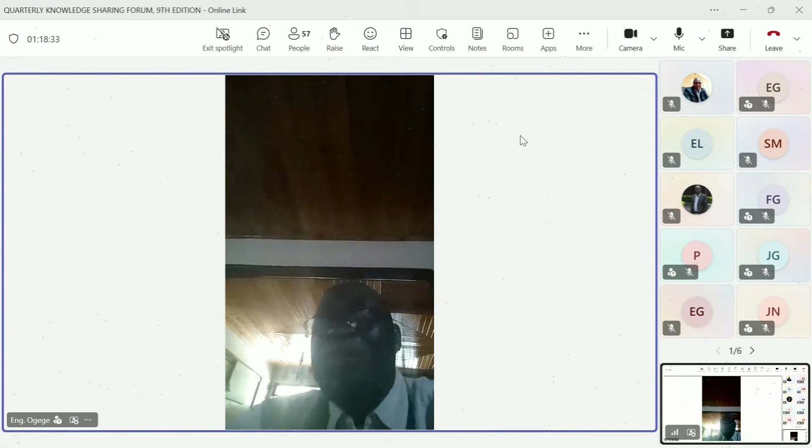The purpose was to produce a pool of trainers that would in turn continue training other younger engineers and inspectors so that this knowledge can be extended beyond the project into all other pieces of infrastructure experiencing the same kind of challenges. This manual therefore represents an important milestone in ensuring the long-term safety, resilience, and sustainability of this strategic piece of infrastructure.

The Dongo Kundu bypass, as you all know, is a critical corridor that enhances connectivity and facilitates trade and supports economic growth. The corridor interacts with the airport, it interacts with the standard gauge railway, it interacts with the old railway line, it interacts with our seaport at Kilindini, and also the new port envisaged at Dongo Kundu and the special economic zone.

So to protect this valuable investment, effective maintenance is essential. The training that culminated into this manual provided practical guidance that will strengthen inspection, monitoring, and maintenance practices, helping to extend the service of slopes and bridges while ensuring safety, not only of road users but also of our crew, the inspectors, the inspection team.

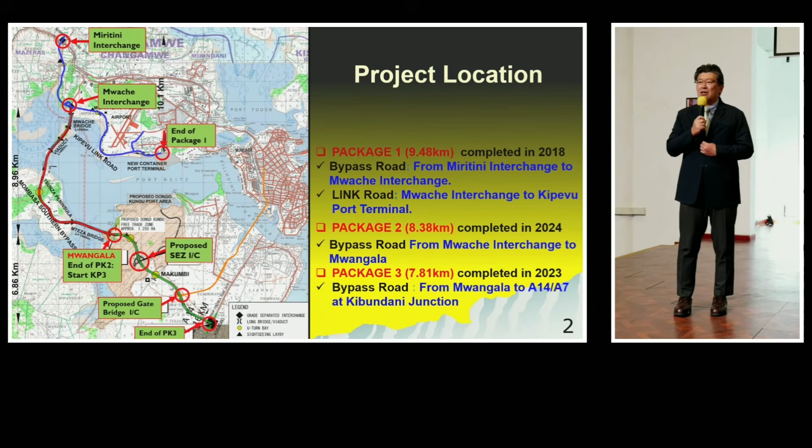Not only the regular maintenance, but also focusing on the two special structures of significance, the bridge and slope, to build capacity and talk a lot with the KeNHA engineers, engage with all the practice of the maintenance works, and then finally put it into the manuals.

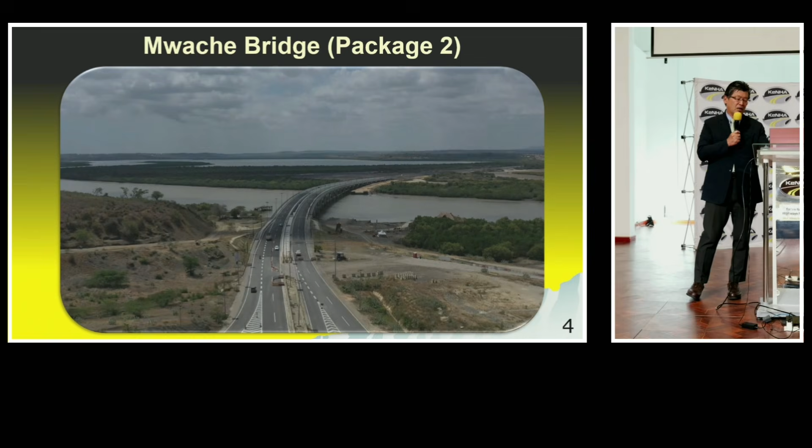So one is slope. There are many slopes because the earthwork deals with cut and fill works. Due to the geological condition, which is very vulnerable, special consideration should be needed for maintenance. And then there are 3 long span bridges on the road: the Mwache Bridge, Tsunza Viaduct, and Mteza Bridge, which is the longest bridge in Kenya as of now. Also, there are a lot of structures like U-turn bays on the way.

As I say, our consultant work includes maintenance advisory works, which is the first case. At first we didn't know how to do it - what should we be advising to KeNHA for these new structures? But we decided to focus on the bridge, long span bridges, which are very unique compared with ordinary bridges, and also the slope, which compared with other slopes has very vulnerable conditions requiring special protections. Also, the condition of the adjacent structure, the airport, is a bit complicated, so we try to do something special - techniques or procedures to deal with this slope.

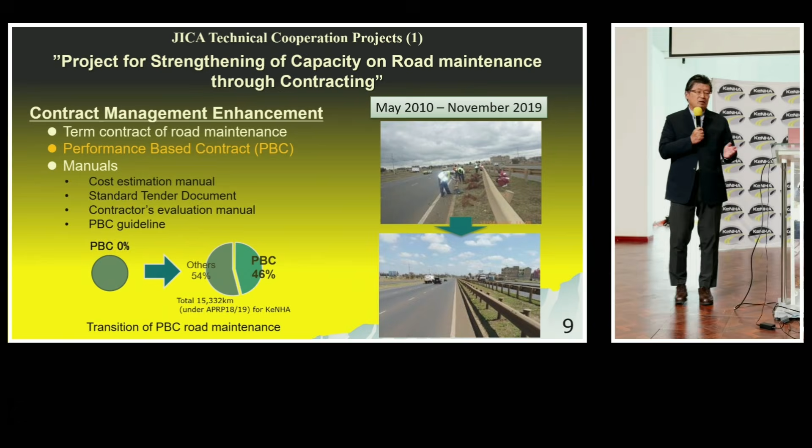But we also collaborate with other JICA funded projects, which is the PBC project, which is already done and is now the norm for routine maintenance in Kenya. And also there's an ongoing bridge maintenance project done by Fujiwara-san and others, which is now almost finished.

So when we started the advisory works, those two things did not yet exist. But gradually over the period, these two new procedures of maintenance were put in place, and are now exercised a lot. So we collaborate with them, so the bridge is already integrated into all the bridge maintenance systems across Kenya. But we should focus on the special consideration on long span bridges by the sea.

The PBC is already put in place in the Mombasa Southern Bypass. So how to integrate the PBC contract to deal with the slope - we're just focusing on slope, but basically routine maintenance will be conducted within the PBC scheme.

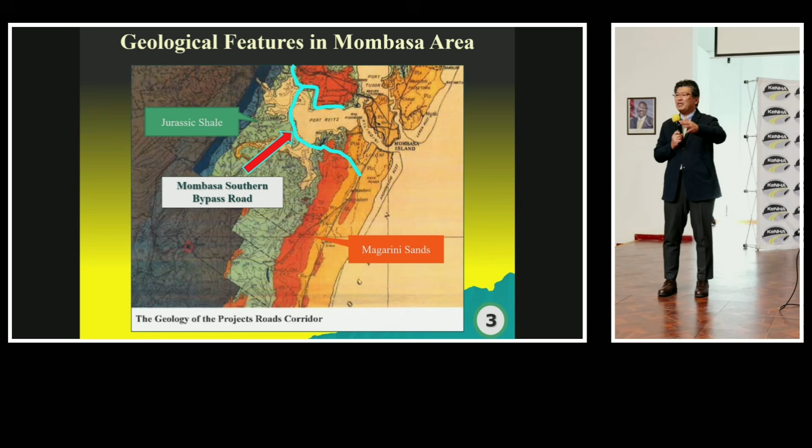I can explain about the condition of the slope, particularly in the end part, which is in the Mombasa region, compared with other regions in Kenya, which is relatively young because of sediments from the accumulation of sand brought from the sea. So the two major features in this region, one is Jurassic shale rock.

So once exposed, it's easily weathered and has no strength at all. That's the condition. Sometimes you can find this in the area around the Mwache junction and beyond, to the conjunction with the northern corridor. Another thing is...

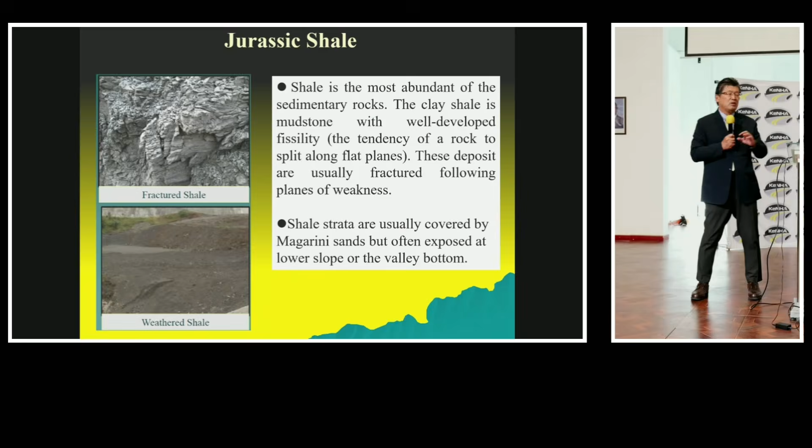...just accumulated on the shale, called the Magarini sands - I never heard of the name before. But Magarini sand is very soft, unstable sand sediment which is on top of the shale. You can see here, the Magarini sands. It's very unstable and easy to be eroded, creating gullies. The surface water runs and digs the land, making gullies, and it's easy to erode. That's the area, which unfortunately is around the airport areas.

So that's the condition given by the design teams. That's the regular cross sections of the road to deal with.

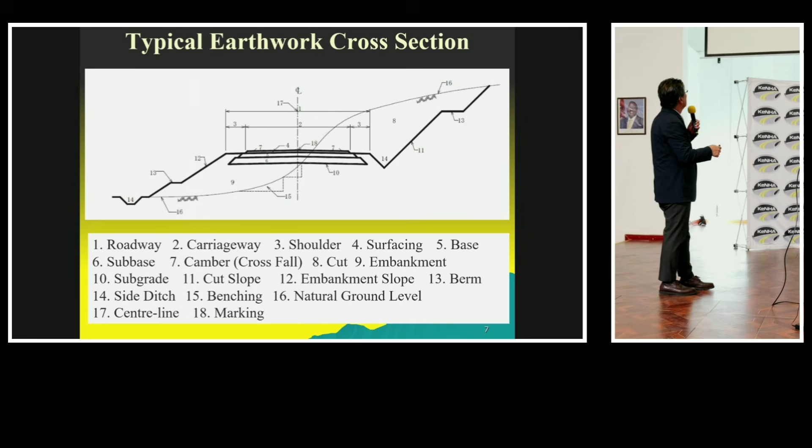Usually this is the original cross section. So in order to build these roads here, we have to cut part of the slope and fill it on those, and then make a flat space, and then make a road with shoulders and drainage systems on both sides, and then there's a slope here.

So in a design stage, we have several things to consider in order to decide where to put the roads. Because the budget is limited, we have to minimize the cost as much as possible. So the point to be considered in design is to balance the cuts and fills, so that the volumes of the cut section can be put into the fill sections. We try to balance it so that there's no additional soil or export of soil from the ground.

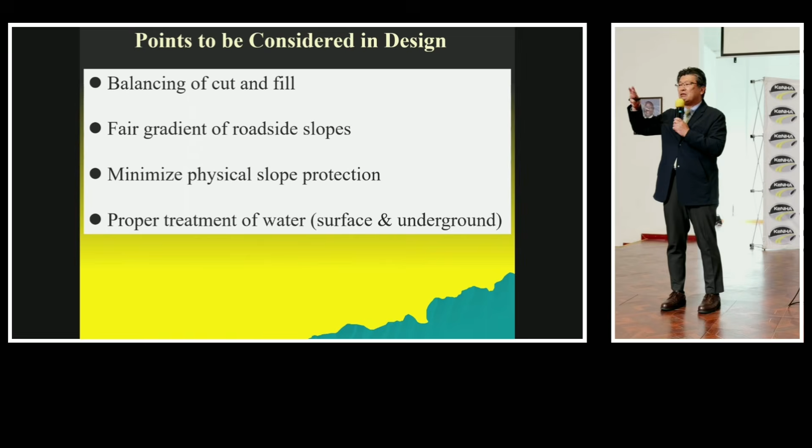And then the slope should be at fair gradients, depending on the condition of the slope sections. Where it's sand, it should be very stable, like 45 degrees. If there's rock, and it's very stable with no weathering, then the slope can be steep and self-standing.

But sometimes, due to the limit of our road reserves, which is happening in Kipevu Road, because of the airport on one side, and then the SGR, and the mangroves and coastline on the other side, we have to think about the alignment within the limited space. So we try to minimize the slope protections, but somehow we have to protect unstable conditions to keep them stable.

Then the problem is always the water. The water is coming, and Mombasa is a monsoon area, so there's lots of rain. Sometimes it's on the surface, and sometimes it's underground. The water is always a problem and nuisance for slope protections.

In the southern bypass, the problem is happening in two areas. One is Mwache Junction, which connects to package 2 of the corridor, and then the area around the airport.

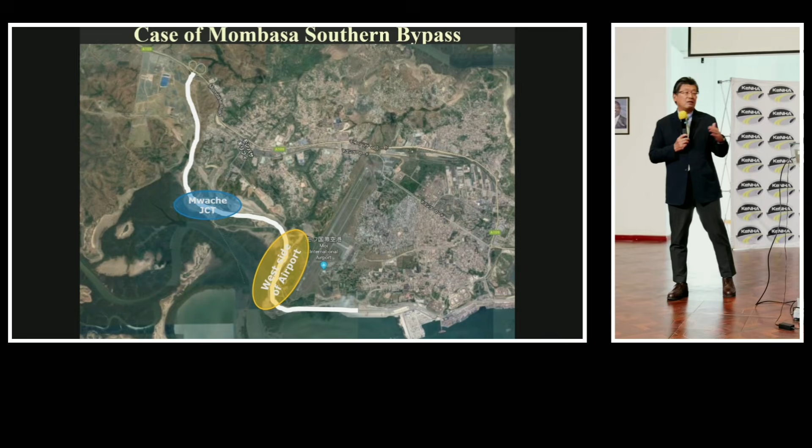Especially the airport area, which looks like this. There's a Kipevu Road here. There are slopes, and on top of the hills, there's Moi International Airport here.

So the road is here because the SGR is coming here, so the alignment of the road should be here, but only between our boundary, the road reserve boundary, and the shoulder. We have to cut the slopes, but sometimes we have steeper hills. Then, in order to keep the stability of the slope, we have to put in slope protections.

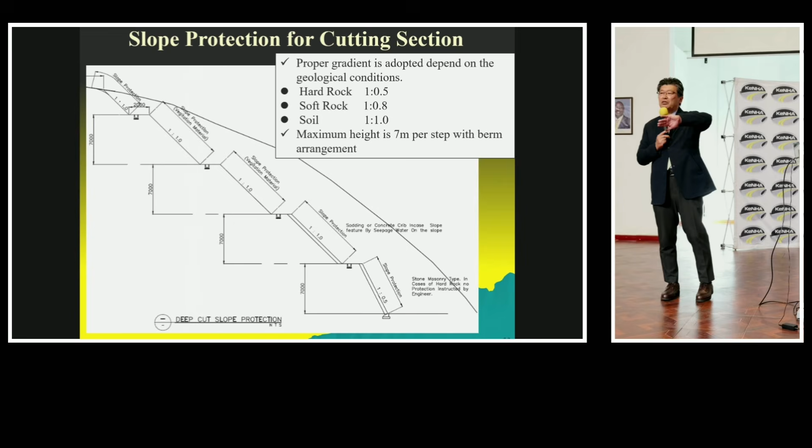So this is an ordinary cross section of the slope. Usually 7 meters high, and we try to make the gradient bigger, but in this case it's 1 to 0.5, which is very steep on the first slope, and then 1 to 1 on the second, third, and fourth, up to the boundary between KAA and the road.

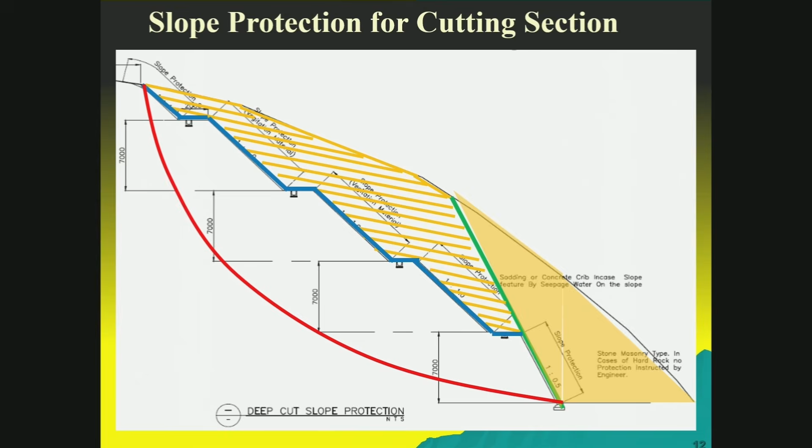We try to minimize slope protection structures because they're very expensive and very difficult to maintain, but it's inevitable. So in design, we have to choose the proper way of protecting the slope.

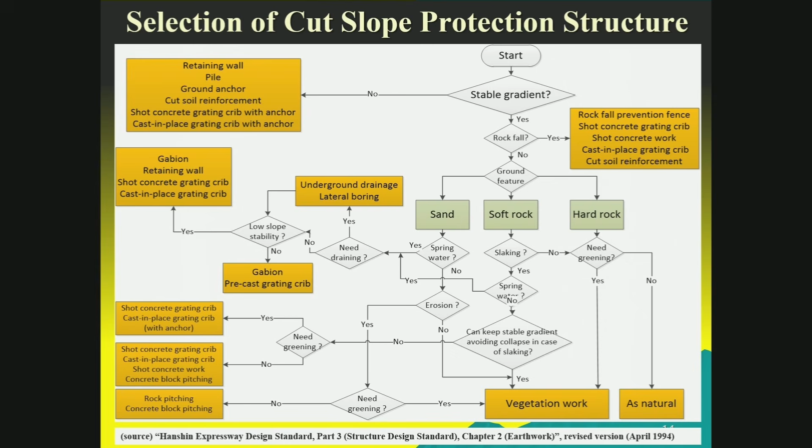So we have 4 protections for cut slope and 1 protection for the embankment. One is stone masonry, which is a block layer of protection, the strongest protection, so we use it for steep structures, usually on the first layer, first slope, just beside the road, because it's the most important part to protect the road.

Then gradually we try to reduce the gradients, and we use 2 types of structures, called rip rap, which is covered with stones and connected to each other with cement.

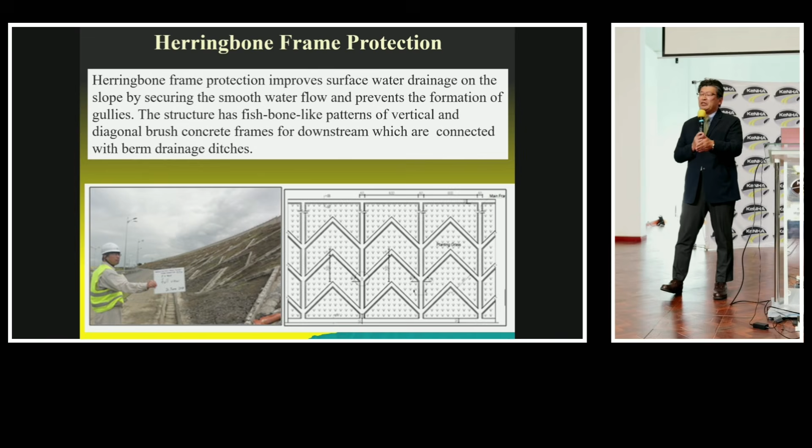Another reasonable way is to use herringbone frame protections. These are frames, not concrete, stone covered, but look like a herringbone, which is a frame construction. The frame itself clings together to protect and support the slope. This frame is also used for drainage, and the area between the frames is where we put grass to protect it.

If the slope has lower steepness and less gradient, we just put grasses. The grass should be deep rooted so it can grow naturally and protect the land and the slope from sliding. The choice of grass is very important.

It should again be deep rooted and indigenous. We don't want to bring exotic grasses into Kenya, so it should be domestically grown.

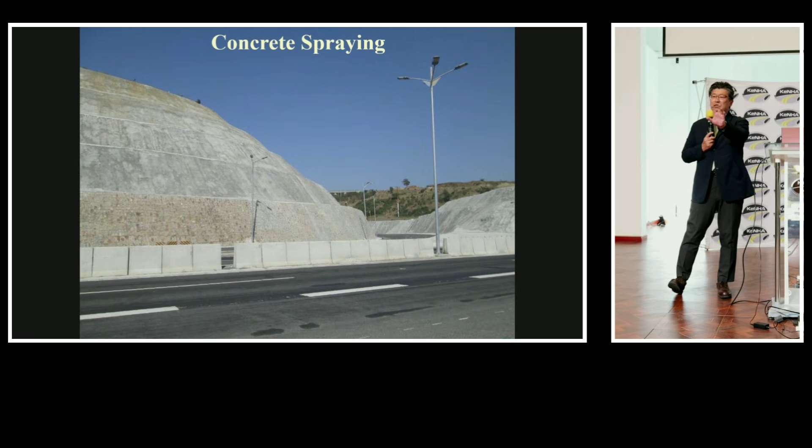When you deal with shale, Jurassic shale, which is strong enough, but once it's exposed it weathers easily and becomes less strong, so we spray concrete. These pictures are shown at the Mwache junction. This is very steep, about 20 to 30 meters high, and we spray concrete to protect it and not expose the shale rock from outside.

Another important structure for slope protection is not protecting the slope itself, but dealing with the water. Water is a very important factor that makes the slope weaker, and the Mombasa region has lots of water and rainfall, so the slope drainage facilities or systems should be carefully done and maintained.

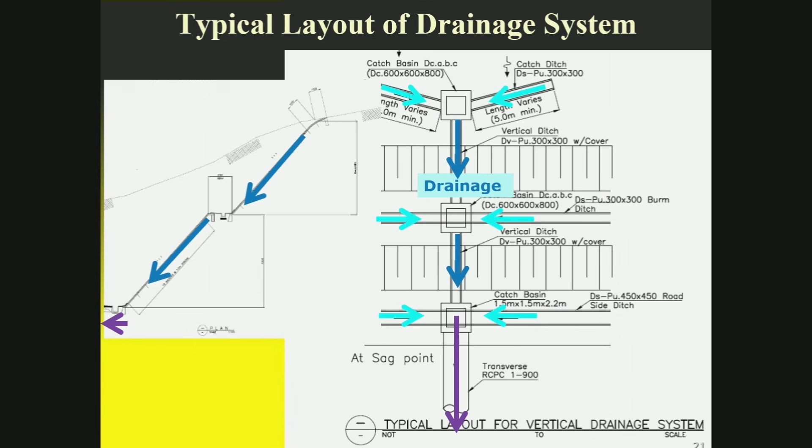A slope needs a systematic drainage system, not only lateral drainage, but each slope gathers water and puts it into one place, then vertical drainage carries it into the catchment, then through culverts into the ocean. That's the system, but once it's broken in one section, the water overflows onto the floor and sometimes damages the structure.

This is one lateral drainage system, very important, just beside the boundary of the airport and road, called the cut-off drainage. It actually cuts off the water coming from the airport so it doesn't go into the slope, bringing it instead to the vertical drainage, properly carrying it down without overflowing.

But even if we properly design and construct it, the slope is still a very unstable thing, so there are lots of failures, which are sometimes inevitable. This happens a lot in Japan, because Japan is a land of mountains, so there are lots of slopes. We have a long history of big failures and catastrophic damage on the road.

Several phenomena occur, the most notorious being landslides. You can see landslide lines where water comes down and so much water goes underground, or massive erosion happens. Once there's one trigger, it makes the whole mass of land slide down toward the end.

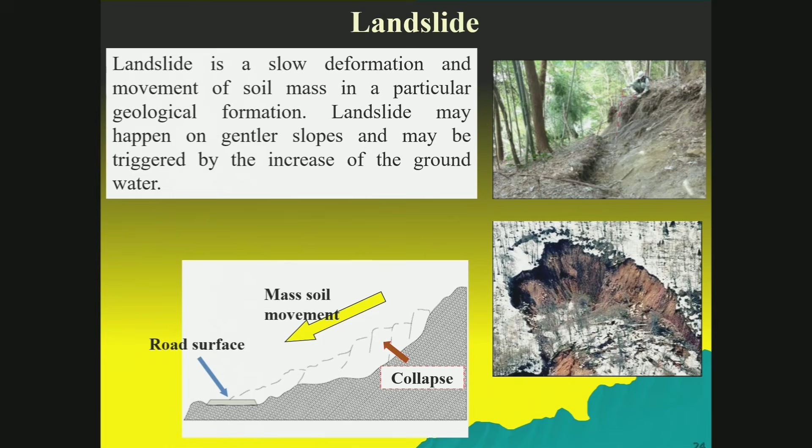I will show you one very dramatic video of a landslide happening in Japan.

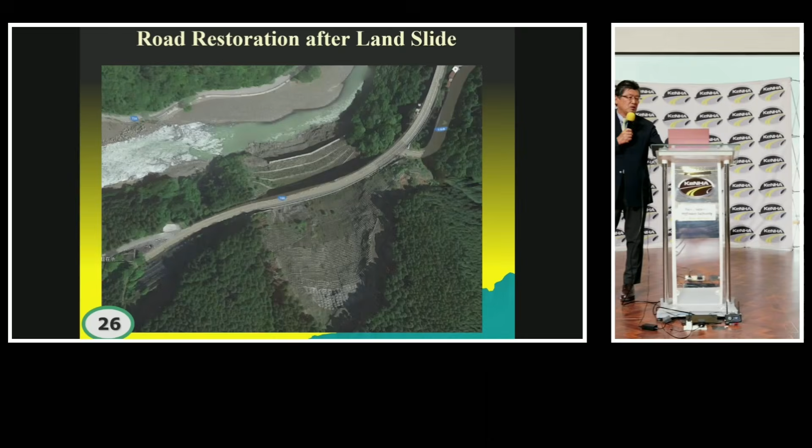This is the picture of the aftermath. See how massive the landslide is.

It's important to show the video itself and how dangerous the slope is, but also for the road authority, think about why this picture could be taken. It's because we stopped the traffic beforehand. We knew the landslide was about to happen, so we closed the traffic, monitored it, and put the camera on. Then that dramatic picture or video could be taken. That's the importance, so of course there were no casualties, nothing.

But the damage is very serious. It takes years to restore it. In this case, instead of putting back the soil, we built a bridge over the landslide.

Another thing which may also happen in Kenya is mass rock failures, which happen a lot and are of course catastrophic. Even with rock, it weathers over years, then cracks form, and once there's a single rainfall or an earthquake, a huge mass of rock falls from a very high point down to the ground and damages the road.

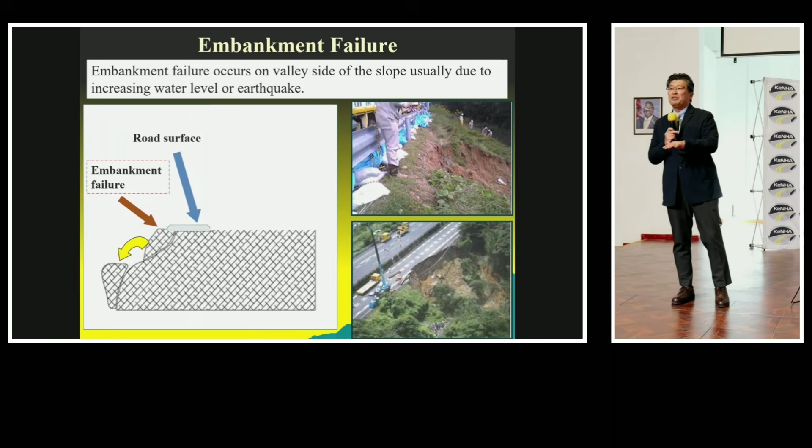Embankments are fillings of soil that you need to protect; compaction alone is not enough, and embankments can also cause landslides. The trigger factors for these kinds of failures are many. In Japan we have earthquakes, but mainly rainfall is the trigger.

Of course, there is a human aspect, like lack of construction, that will be the cause, but mainly it's a natural cause. The rainfalls in Kenya are the biggest factor triggering this kind of landslide.

Once we properly finish the construction, the maintenance stage begins. Unlike an ordinary road, the most important thing for the slope is stability—to keep nothing happening, the slope itself standing, and over the years, even if rain comes, the slope still protects the soil from reaching the road, and nothing happens on the road.

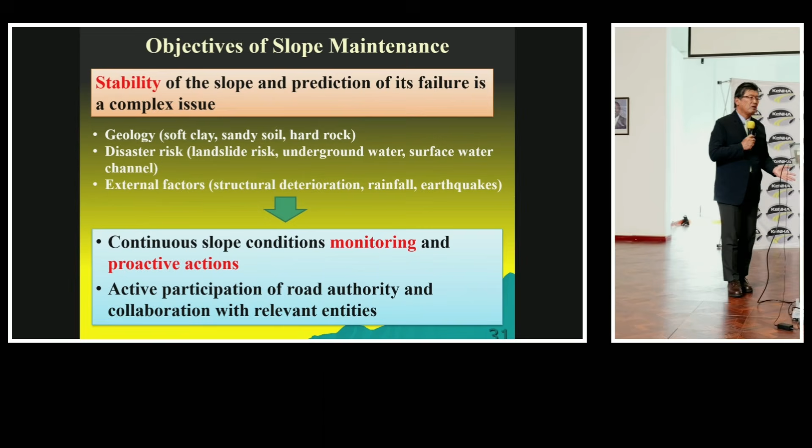But it's easier said than done. The stability over the years gets less stable due to so many causes: soil conditions, risk-causing factors, and external factors.

The change in the slope is sometimes very difficult to see, because the slope is sharp and steep, so it's difficult to access, and sometimes it's covered with bush so it can't be seen. Also, many things happen underground—it's invisible.

What we have to do is keep monitoring, to check and take preventive measures, not countermeasures. That's important—unlike earthwork or pavement, where if you have potholes you take action. But with slopes, as long as we think it's fine, nothing gets done.

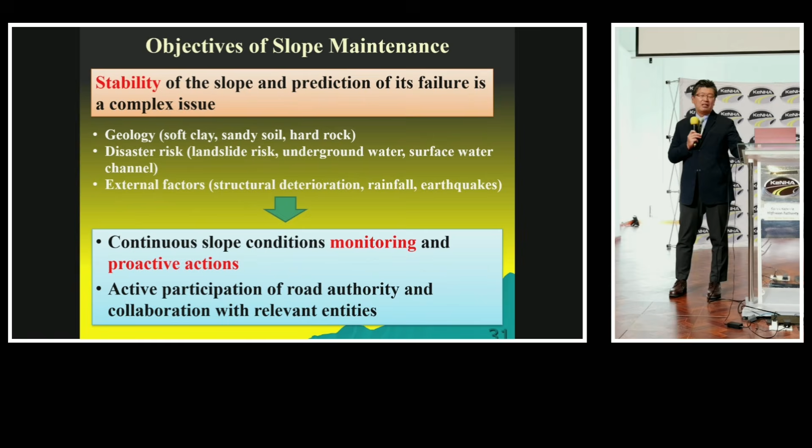Monitoring is still very difficult—not just visual checks, because access is hard and things are hidden, and some of it happens beyond the road reserves. Since the airport is a very secure area, we cannot easily go to the site. So what we're trying to do in Mombasa, especially on Kipevu Road, is introduce drones.

Drones are now common technology in Kenya, so we fly drones using very high resolution cameras to capture images of the area—not just the road reserves, but beyond them, so the whole entire region can be captured.

The image is very high resolution, so we can find all kinds of failures not visible from the road, and sometimes even difficult to approach. We found lots of failures, especially sinkholes caused by eroded sand.

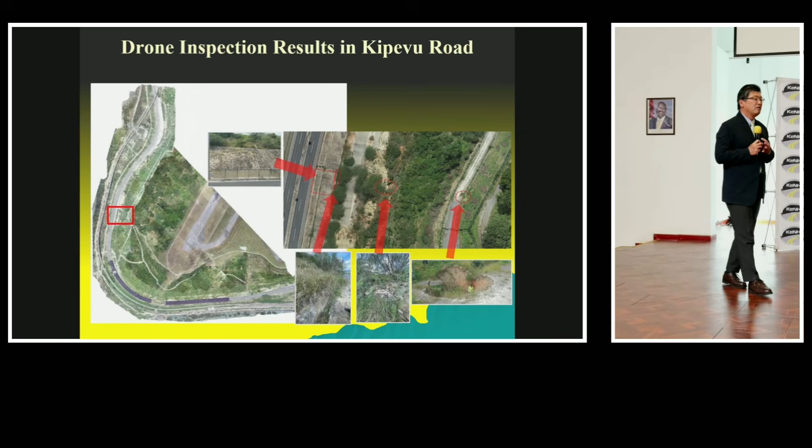There are lots of sinkholes within the airport—these are failures within the KAA premises. We found many such spots in the area, and of course we shared this information with the airport authority.

With this high resolution imagery, we can also get point cloud data, which can be converted not only into flat images but also 3D images. You can see the gradients here—this is the road, this is the airport area—and we can see how steep the area is.

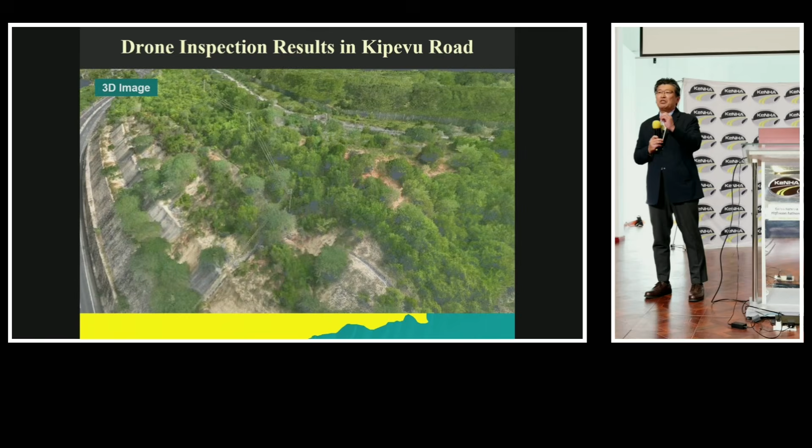We can see lots of sand erosion happening across these areas. With the 3D recreation, it becomes easier to understand the soil conditions together with the slope gradients. But that's just the still image—with the point cloud data and special applications, we can see much more detail.

Then you can switch it. So this is a special application that the 3D image can be recreated like this. So you can move to any place, then you can zoom in and zoom out.

For example, you can see this is the damage area with the erosions, and the damage on the drainage systems, because you can see the sand already goes beyond the slope. And also you can go to the airport area, so this is the patrol roads within the airport. You can see this huge sinkhole happening on the road.

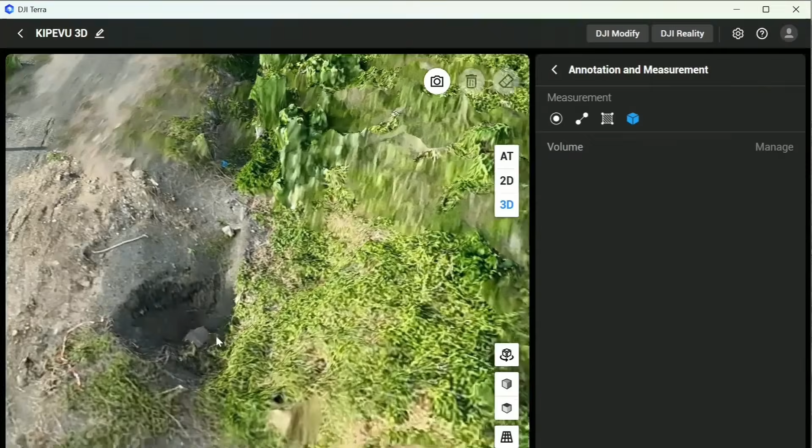Can you zoom in a little bit more? So you can move the image to go to any place. Then you can go to other sections, where you can find numerous sinkholes happening, also within the airport area.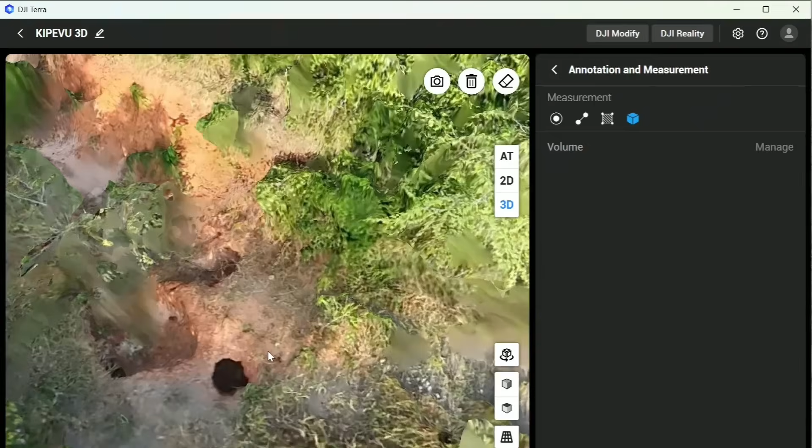Yeah, here. Can you zoom in as much as you can? See, you can see the potholes. So the whole section, the whole area is now sinking. This is within the airport area, which is inaccessible, and also within the bush so it's not visible from anywhere, but the drone can capture it and you can find it.

So this is more like screening the whole region to find out the damage. Then once you find the damage, maybe you should go and check what it is, because sometimes there are mistakes - the hole is not a hole, it should be the shade of the trees. But it's worth seeing these conditions and then finding and trying to think about the solution.

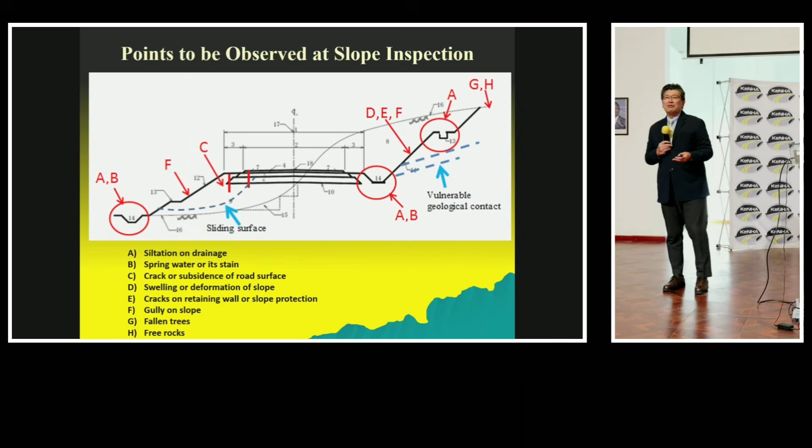So using the drone, there are several places which should be checked for these slope sections. The most important thing is not only the road, not only the drainage systems along the road which are inaccessible, but here, the slope - drone is the one way to do it. Then if you can access it, you can go reach closer, you can go there as much as you can, then put it into the database.

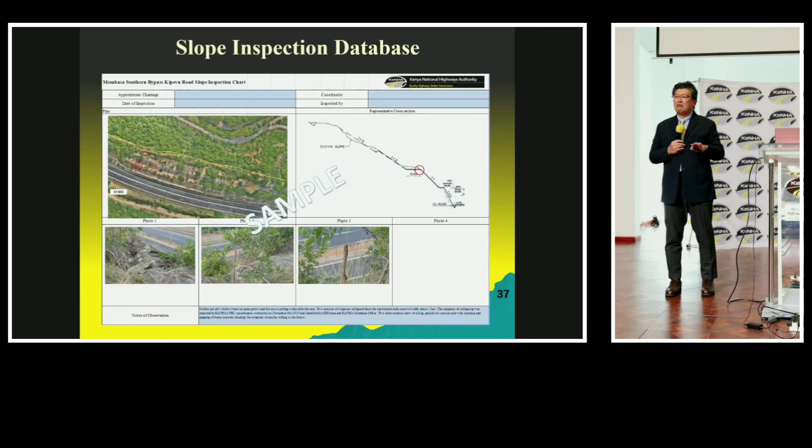I think the pictures themselves - the drone photos that you get closer to give more detail - show the damage, and also the location is the most important data, so that they put into the database. It's not necessarily more like a checklist, just the data - the photo can tell everything.

Then you keep on inspection - the drone inspection that we conduct with the consultant teams is after rainy seasons, so twice a year, two times actually: around June after the rainy season in May and April, and also January or February after the rainy season in November and December. Because rainfall is the trigger, one of the biggest triggers causing the damage.

Then routine maintenance should be done because you conduct the PBC. PBC is done but it's usually mainly focused on the road and drainage system on the shoulder. But what is important for this slope maintenance is routine maintenance for the slope above, which is sometimes missed but important to check.

We advise the coast regions to conduct this routine maintenance integrated into the regular routine PBC works, focusing on the slope. One is routine patrol of the slope - usually you can climb up to a certain point to check the conditions, and if you find some irregularities, you can do routine maintenance works.

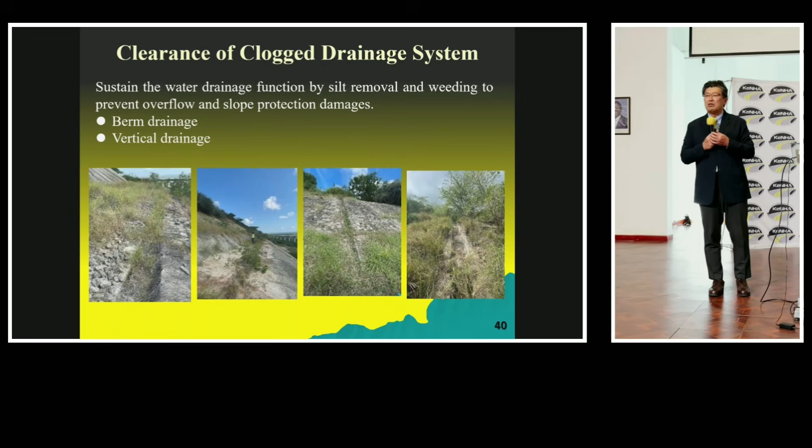One thing is drainage systems. Drainage systems easily get silted and filled, so that the water drainage system cannot work. So we just desilt and excavate and put it back into normal function.

Another thing especially typical in slopes is trees and bushes which are sometimes unnecessary - trees or bushes growing from the slope or growing from the drainage systems, which is unnecessary. The tree itself is not so the enemy of maintenance - sometimes the tree itself is a protection. So you can choose what is necessary or unnecessary, but usually clear the unnecessary trees on the slope.

And sometimes there are failures in the protections - sometimes it's falling down like silt, or the fractured concrete cover which is going down, or loose rock which should be removed, because being loose, it could go down toward the road at any time.

So back to the Kipevu Road, we conducted the drone survey. We checked, we evaluated the photos, then checked the soil condition based on the previous geological survey from the construction stage. Then we tried to find out the cause of the problems.

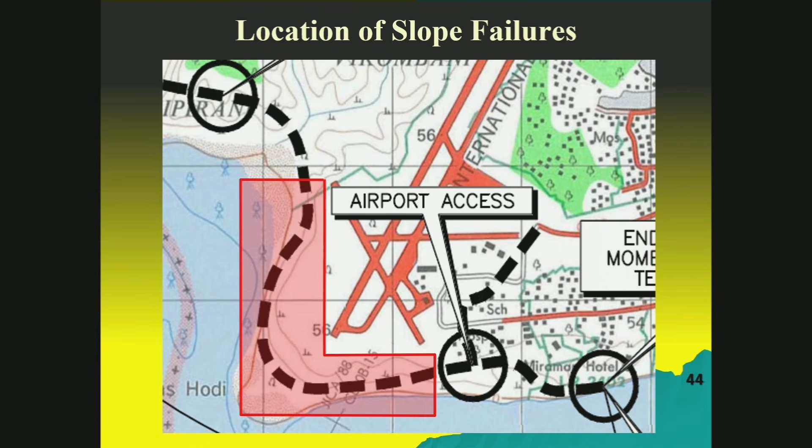We should be focusing on the area around the airport, especially the almost 300-meter section just west of the shelter sections, where there's not yet significant damage toward the road, but we checked the drone photos and also the geological surveys, and it seems some failures are happening right now.

The drone image shows a very steep slope with 4 layers, and between them there are berms, so it's more like 30 meters high. Just above, on top of the hill, there's a boundary with the road reserves, and beyond that there's an airport.

This shows that the soil is moving onto the surface, covering the slope and reaching the second slope, which is very close to the road.

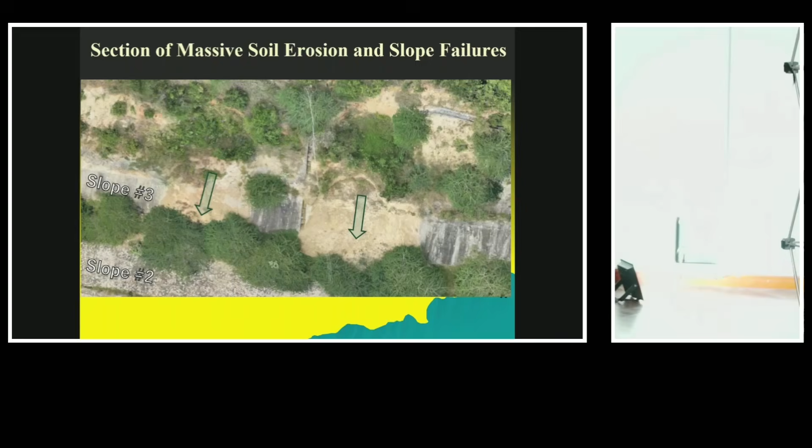The irregularities are everywhere, the sinkholes that you showed, also in the airport and in the road reserves. That caused damage to the drainage systems, the most serious being the failure of cut-off drains on top, so that the soil is eroded together with the drainage structures - everything is gone.

Then there's a sinkhole inside. The cut-off drain is supposed to catch the water not only on the slope but direct it toward the vertical drainage, but instead the water runs freely, taking the soil with it.

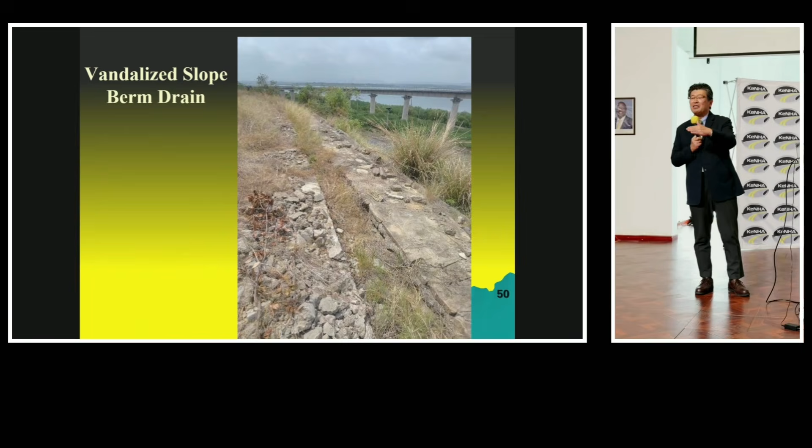Another issue is vandalism of the berms. The drainage is supposed to catch the water moving toward the vertical drainage, directing it properly, but this reinforced concrete structure, due to vandalism, is all gone. So the functionality of the drainage is lost, meaning the water isn't caught but instead jumps onto the slope.

Together with all the information, data, and previous surveys, we were able to find out what's happening, and it's confirmed by the geologists and geotechnical experts from Japan that this is what is happening in this area.

So this is the boundary. The water is always falling, and because of the flat lands of the airport runways, it's easy for the water to collect there. Supposedly the water is treated by the airport and not brought down to our slopes, but properly drained elsewhere down to the ocean.

But because of the damage to the drainage system in the airport, and the erosiveness of the soil due to the Magarini sands, the water goes down into the ground very easily everywhere. That makes the sinkholes happen.

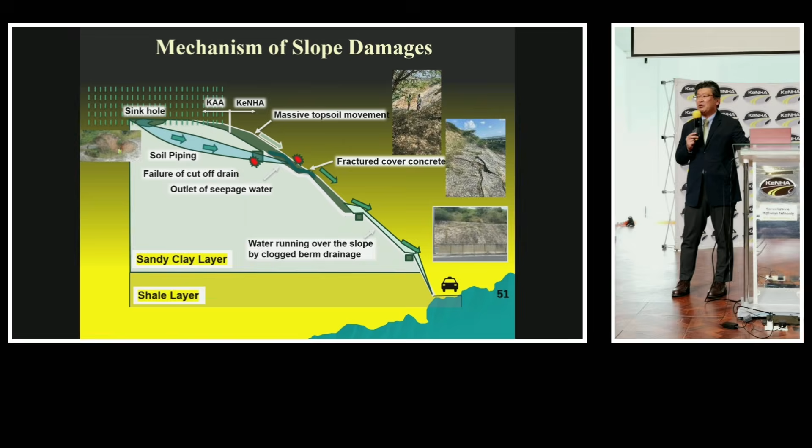The same thing happens - there are lots of sinkholes, not just close to the boundary area, but also near the airport runway. So these are problems not only for us, but also for the airport.

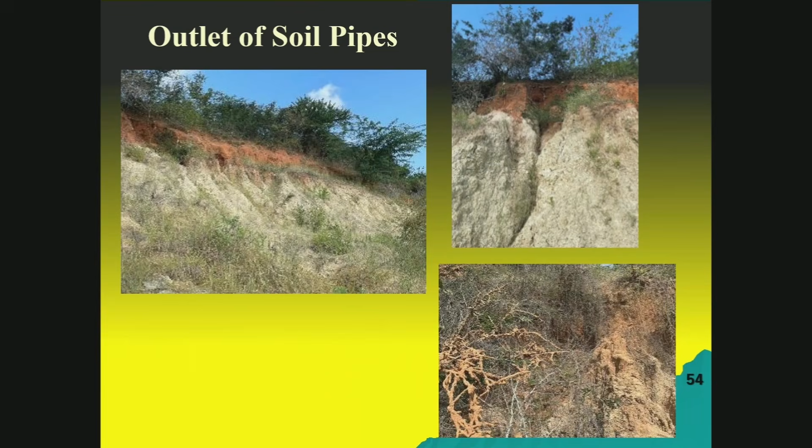This is the section where the water is splashing out, forming gullies. You can see how the water is now splashing out, and no one can see it. Hopefully someone can go out during the rain to witness the phenomenon of water splashing out from the slope.

So it's one of the outcomes of the drone survey. Especially for the Kipevu Road section, immediate action should be taken before something happens on the road, and to prevent road closure by soil erosion and water.

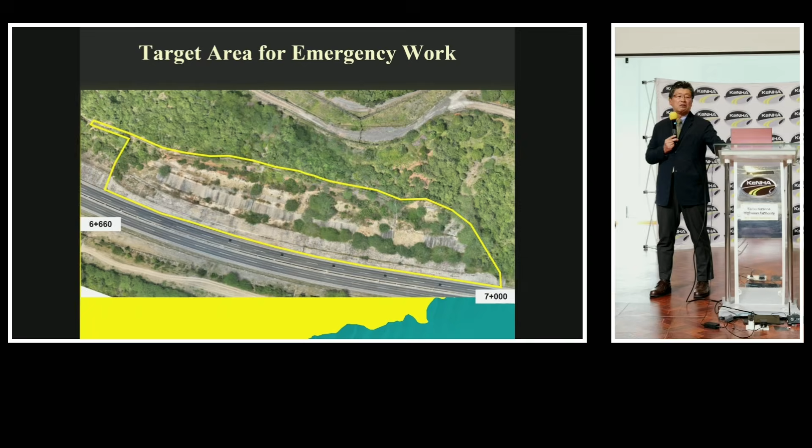So in the last six months we consulted with the Coast region together with the maintenance department to take some emergency actions. They focused on this 300 meter section with numerous sinkhole damage and drainage damage that should be recovered, along with some protective measures.

Those damaged drainage systems should be recovered, and since this is soil erosion, we should put in some gabion works, gabion installations, to protect the soil and prevent the soil and water from going downward. Then take all the necessary bush clearance and debris removal.

Then also the most important thing is the installation of a staircase, because we expect people going up. Right now we can't go up without a rope. So we try to put the staircase so it's easier for the inspectors or repair workers to go up.

Mainly we try to repair the drainage system back to normal condition, like this one in this particular section. The water keeps coming - that's inevitable - but the water is properly treated toward the ocean.

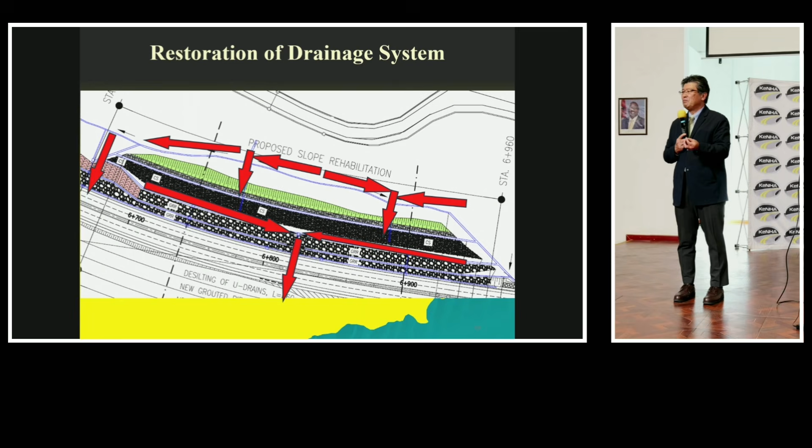So that's all the works and activities we have done in the last, I think, about 5 or 6 years. Not only did we do advisory works, but also outreach and capacity building. We've done two maintenance seminars - one drone seminar where we introduced drone technology, and one routine maintenance seminar training together with KENHA, Coast Region, and the PBC contractor.

But finally, at the end of our assignment in advisory works, we summarized everything into manuals - slope manuals - that contain all kinds of information from geological surveys to maintenance, including all kinds of technologies used for inspection and repair works. This manual is a product of KENHA, and it's important to share with other authorities like KAA or other authorities with similar problems.

Also, this manual is not just for one part - it can be used for other regions which have similar slope problems. So that's the end of my presentation. Especially the drone - that is the first case, as far as I know, in Kenya to use actual inspections this way.

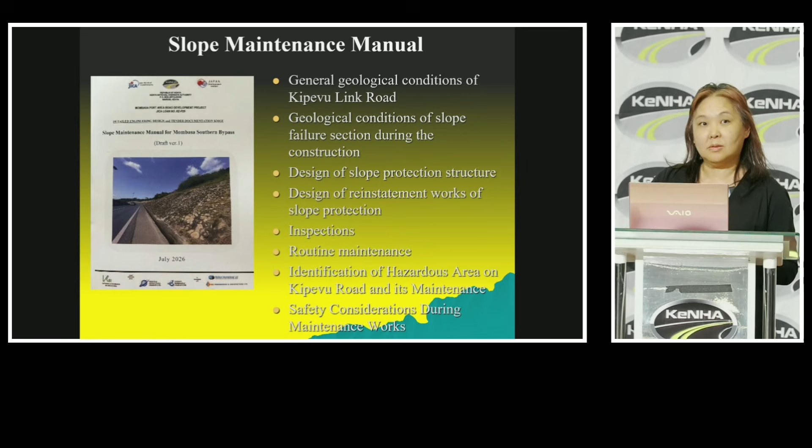I'm sorry to keep you waiting. Oh, could you help me? Sorry. Oh yeah, it's coming, sorry.

So at first, to do the maintenance, we have to know the features of the bridge. Especially, understanding the design of the bridge is very important for doing the maintenance. So I want to tell you about the bridge configuration of each bridge.

Let me talk about the bearings. Because these bridges are continuous girder bridges, they have this kind of set of bearings in the bridge.

There are 2 types of bearing: the move bearing and the fixed bearing. The fixed bearing absorbs the rotation of the superstructure, takes vertical loads, and acts on horizontal forces. So it doesn't allow horizontal movement, but allows rotation. Fixed bearing can absorb the rotation. The move bearing can absorb both rotation and horizontal movement.

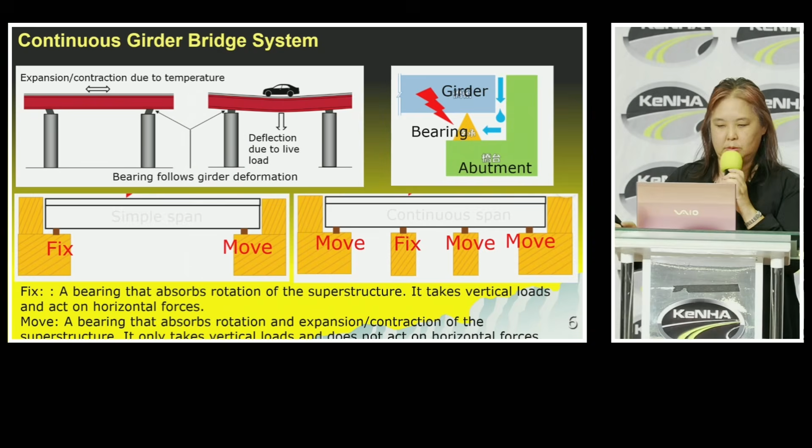This is the typical section of the Mwache or Mteza Bridge, showing the 7-span continuous bridge section. So on both ends there's a move bearing, and for the center pier they have the fixed bearing.

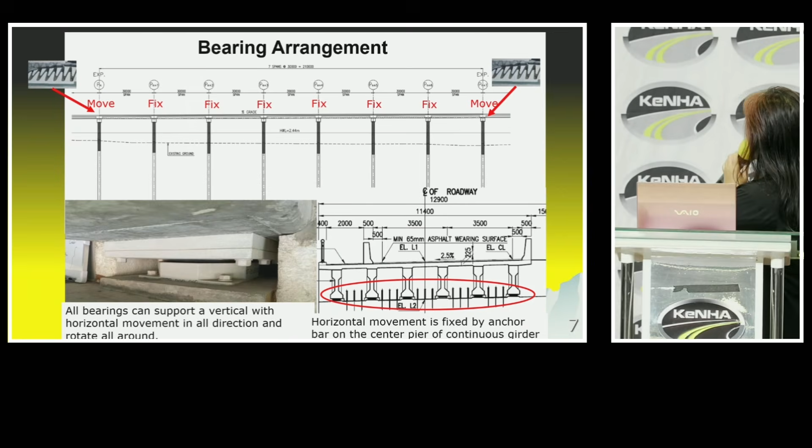On the move bearing, there's an expansion joint here, but all the same type of rubber bearing is installed here, like this. So it can support the vertical load and horizontal movement in all directions, and rotate all around. But for the fixed bearing part, the horizontal movement is fixed by the anchor bar on the center pier of the continuous girder.

This shows the drawing of part of the Mwache Bridge, the girder, and also the pier, like that. So just a moment.

This bridge is designed based on the British standard (BS standard), together with AASHTO and Japanese specifications. The superstructure consists of span lengths of 40 meters and 10 meters in height for clearance of vessel navigation. So not all spans are 40 meters; some spans over the vessel navigation area are 40 meters, and other spans are 30 meters.

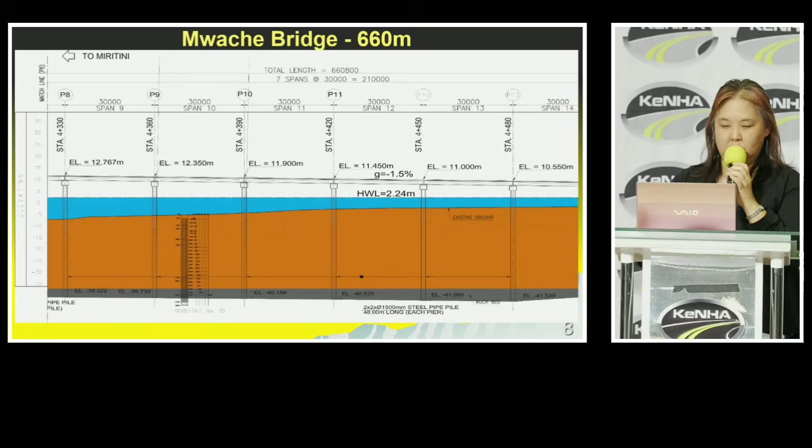For the substructure, considering the constant water depths of both bridges between 5 to 10 meters, the depth of the water is 5 to 10 meters.

For the substructure piers in this Mwache and Mteza bridge, a pile bent substructure is adopted. Pile bent substructure is to raise foundation piles to the ground level and connect the heads of each pile with reinforced concrete beams to form piers. This structure can reduce the number of temporary works required for footing construction, thereby shortening the construction period and reducing construction costs significantly.

This feature of the steel piles: the design life is 120 years based on the BS code, and the corrosion speed is considered in the design based on the Japanese port-related design specifications. The corrosion allowance considered in the design of the steel pipe is 36 millimeters for above sea level and above seabed, and 3.6 millimeters for the below-seabed section. Considering the corrosion in the above-seabed section, using steel pipe pile structure is uneconomical, so reinforced concrete structure is adopted for design, but steel pipe is continuously used from the seabed as a cast-in-situ concrete formwork.

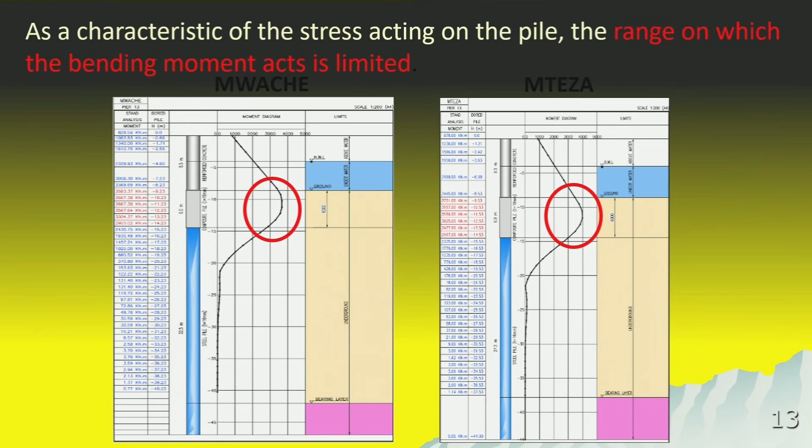So it has a very thick steel pile with concrete inside, and this part is very strong. Under here, it isn't as thick, so it lessens to 16 millimeters, and the concrete is not inside. Over the water, the thickness is 60, and concrete is inside.

Above here, to consider corrosion, the thickness would have to be more than 36 millimeters, but that is not economical. So in the design it was considered to build as a concrete pier here, not a steel pipe. But for the construction work, the steel pipe was extended on top until the beam, so that steel pipe can work as the formwork while the concrete is still inside. This is exposed to the water, so it is painted with epoxy resin and covered.

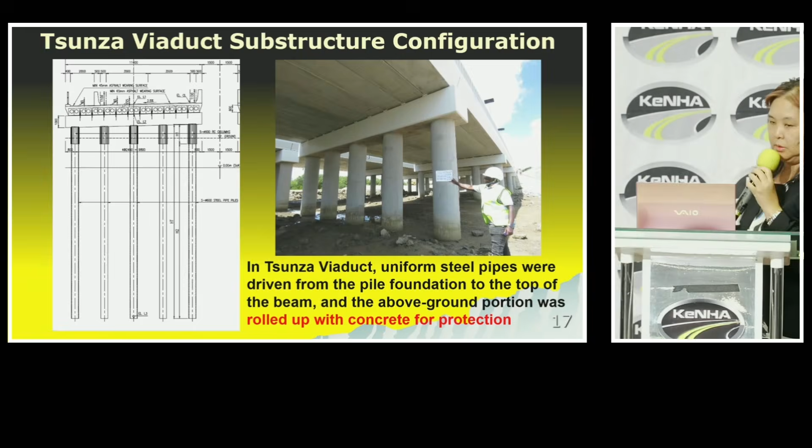Next, for some section, soft ground consideration was needed because this is the location of the Mwache Bridge, and this is the original design. In the initial design, after crossing the Mwache Bridge, it was designed as all viaduct throughout, about 1.3 kilometers of viaduct here. But finally the Tsunza Bridge starts here, and the length is 600 or something. Between the Mwache Bridge and the Tsunza viaduct, the ground is very soft, but the height was not so high, so for economical reasons it was changed to embankment from the viaduct.

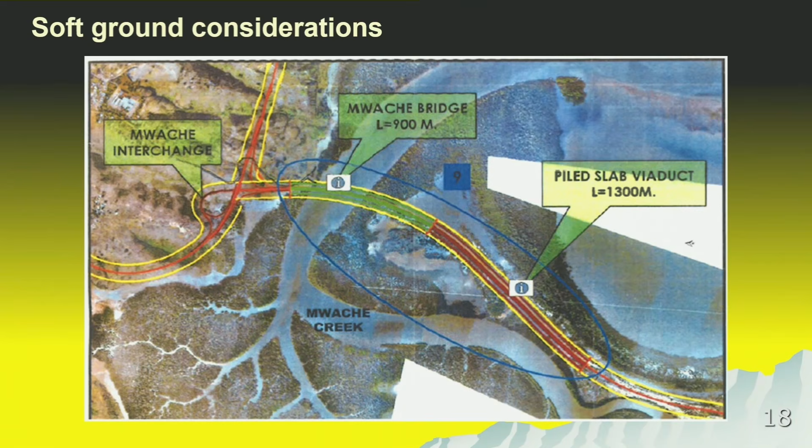A 4-meter embankment was applied, but this ground is very soft because this is a tidal, intertidal area, so settlement was worried about, and it was examined. Between Mwache Bridge and the Tsunza Bridge, this kind of 4-meter embankment was investigated, and you can see this is the N value.

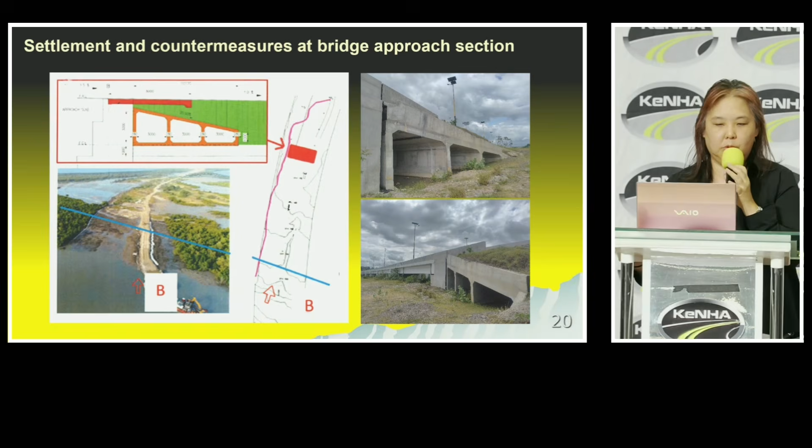Most of the settlement occurs soon after construction, which is the kind of elastic settlement. After that, consolidated settlement occurs. Since 2 years or more have already passed after construction, this settlement has already occurred, and we predict the maximum remaining settlement is 28.3 centimeters for NF2, which is the blue line here. So the residual settlement is predicted as 28.3 centimeters.

In Japan, we have a standard for the settlement allowance of soft ground, and it is said the allowance is 30 centimeters. So this is less than the allowance of the settlement specification in Japan. We consider that there is no special treatment needed for this settlement.

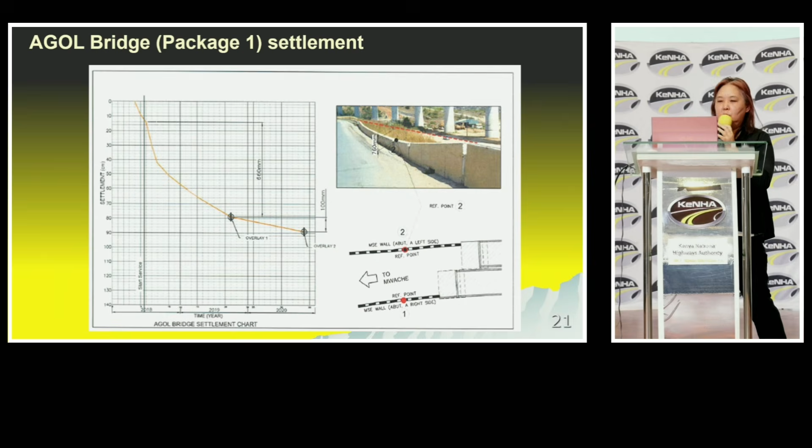This kind of thing already happened in Package 1. Package 1 was opened earlier than Package 2, a couple of years before. There's one bridge named Agol Bridge, and in the same manner, the approach section sank like this. This is the actual measurement of the settlement by time: 2018, 2019, 2020. From the start of service, in 1 year, 66 centimeters of settlement occurred like this.

An overlay was conducted by the contractor during the DNP, but after 1 year, 10 centimeters more sank, so they applied a second overlay. So far the settlement is already stable, but they needed two overlays. So in this Package 2 section, we learned from this case and did the treatment of setting the box culvert structure from the beginning to avoid this kind of situation.

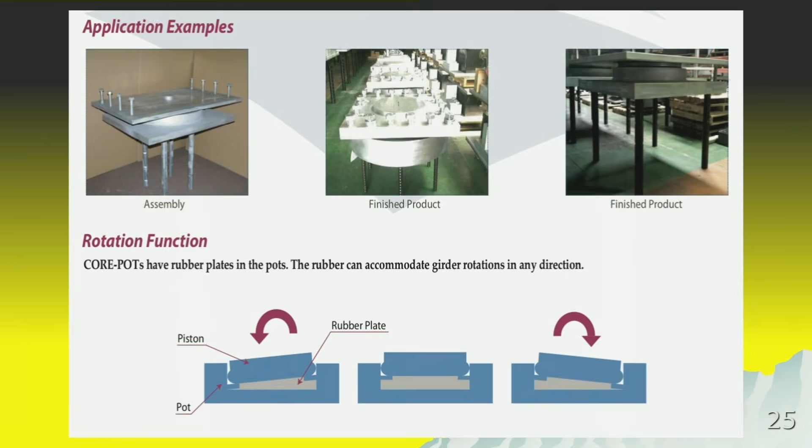The rubber plate is inside the upper shoe and lower shoe and can rotate in any direction like this. The upper shoe and lower shoe are metal structures, but covered with special high durable coating because it is over the sea, so it is more durable compared with ordinary paint.

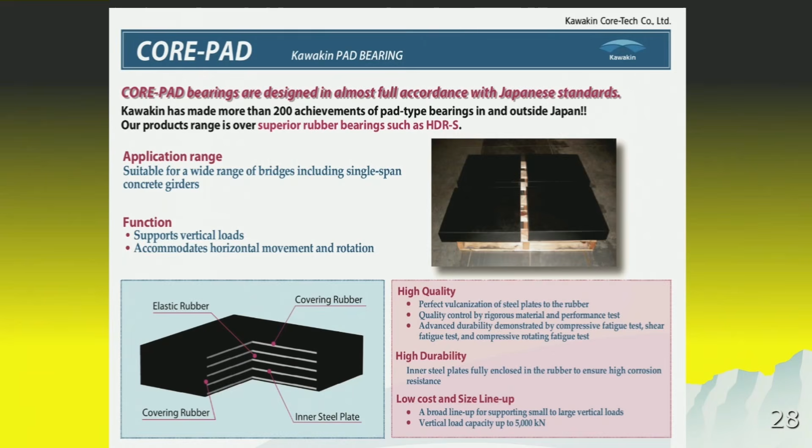And I forgot to explain, but for the bearing, it is the product of Kawakin, a Japanese manufacturer of this kind of things. And the joint is also the product of Kawakin Corporation. They name it KA joint and KFC joint. So KFC joint is the finger joint.

So the main material is cast iron with excellent weather resistance. So the main body is integrated with a finger and anchorage parts. So let me show this one.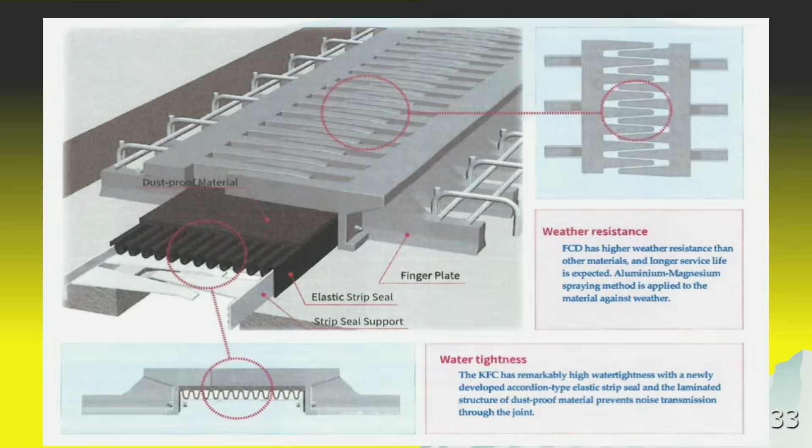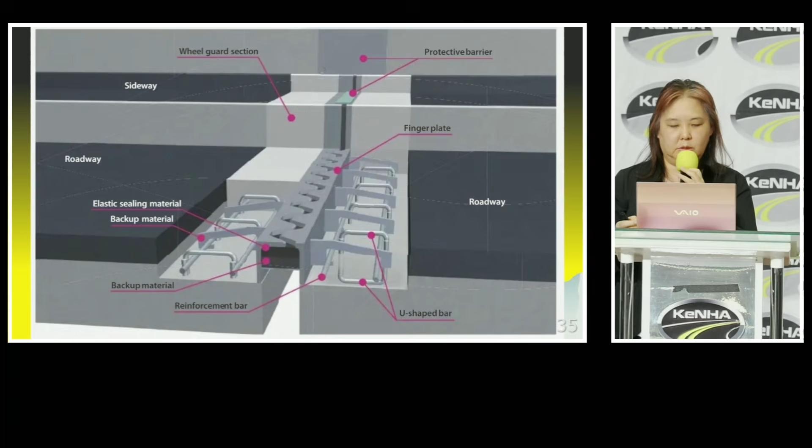And this is for the... sorry, angle type bridge. And the feature of this joint is it's for small movement, and it has a simple and durable design using commercial steel plates for easy manufacture. Yes, that is the feature of this joint.

And it uses a remote monitoring system for operating the street light. I'm sorry I don't understand how to read it, but I think it's French or something - this is the name of the manufacturer of this kind of street lighting system. And they use what they call LoRa.

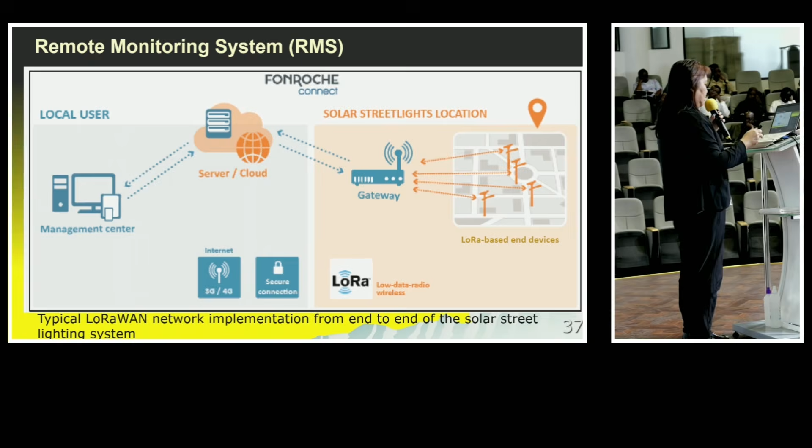So you can observe the situation or operation of the lighting system by this kind of remote system, for the maintenance.

As I said at the beginning, this bridge is very unique. So in the maintenance, we have to think based on the design which part is important to monitor or maintain. And for this bridge, it is a very unique multi-span continuous structure with fixed support on the middle piers and movable support at both ends of the girder.

Movable support connections have expansion joints to secure the calculated gap to accommodate the expansion and contraction margin of the girders. Then if the gap is clogged with dust or other debris, the girder movement is hindered and the entire bridge system may not work as considered in the design. So therefore, periodical inspection and debris clearance, cleaning of the joint, is very important.

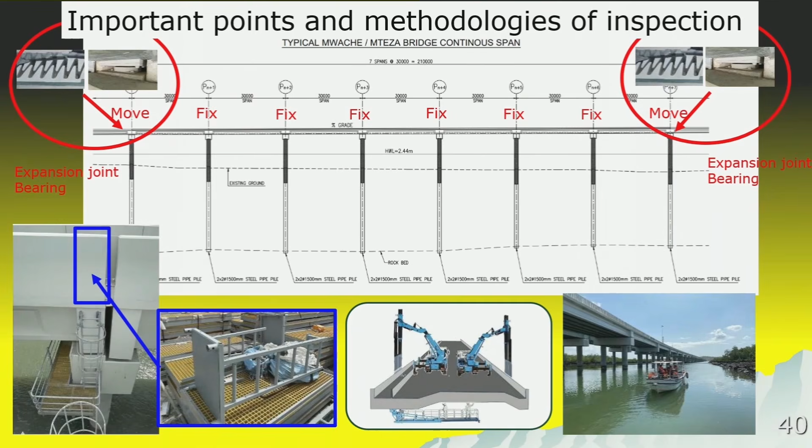So inspections are classified into three: daily, routine, and principal. Actually, this framework is proposed in the JICA bridge maintenance technical cooperation project, so we also follow this way of thinking.

Daily inspection is PBC, so the PBC contractor is in charge of this. The methodology is patrol, and if something is abnormal, they inform the road authority. The routine inspection is the same as the inspection system of KENHA - I think you have ARBICS. So it is the same as ARBICS. Even though this is a special long span bridge, the routine inspection is conducted the same as the ARBICS system.

I'm not quite sure who conducts this one, but I remember it is conducted by road authority engineers, and once a year they will do the remote visual inspection. Next is the principal inspection, which is a more detailed inspection to assess the soundness of the bridges. KENHA will outsource this inspection, and it is proposed to conduct every 5 years.

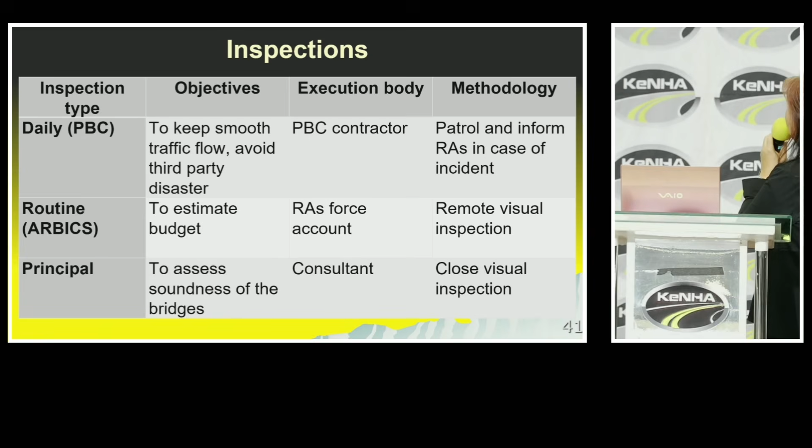The initial inspection was conducted soon after completion of the bridge, but you can think about when to do the next inspection - you could extend it to the next 10 years or so by monitoring the bridge. Anyway, you will do the ARBICS every year, so you can decide when to do the next principal inspection based on the results of the ARBICS routine inspection.

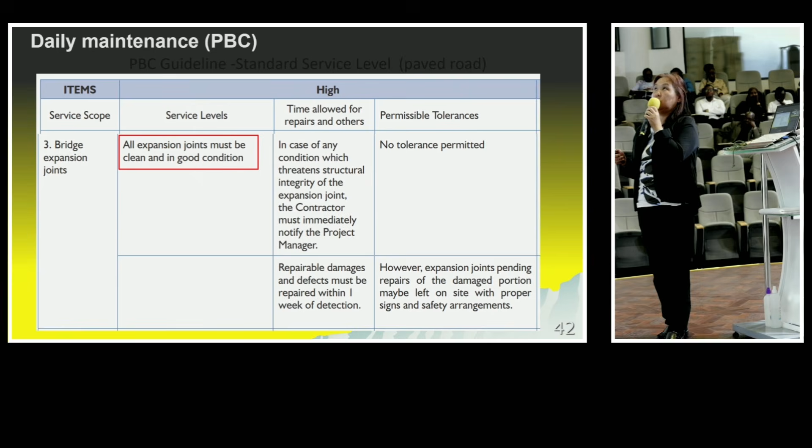So the PBC shows the standard service level in the guidebook, and there's a description in the contract between the PBC and the contractor. For example, for bridge expansion joints, the service level requires all expansion joints to be clean and in good condition. This is written in the PBC contract, so the contractor has to keep the expansion joint in good condition at all times.

For the routine inspection, this is what to do in ARBICS. For the surface, it is simply using the corridor - a pedestrian corridor is set in these 3 bridges, so using the corridor you can check the surface of the bridge. And for the girder or substructure piers...

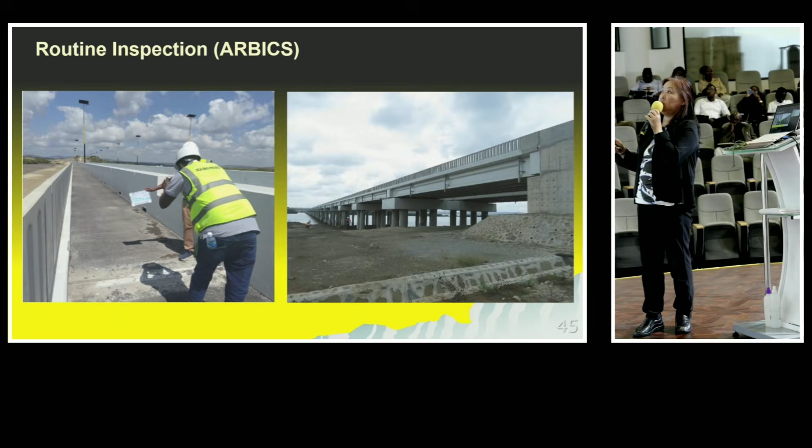This is a yearly inspection using the corridor. It is only watching the pedestrian corridor, but you can also monitor the carriageway from the corridor. This is the Mwache-Tsunza Bridge, but you can easily access around the abutment, or even here you can access easily, so use the ladder in this kind of area.

For the principal inspection, the detailed inspection will be conducted, and this is what to observe: for the superstructure, girder, deck, all kinds of main structure, also accessories, pavement, drainage, and lighting system, and road signs have to be checked. So we classified this into 3 categories by area.

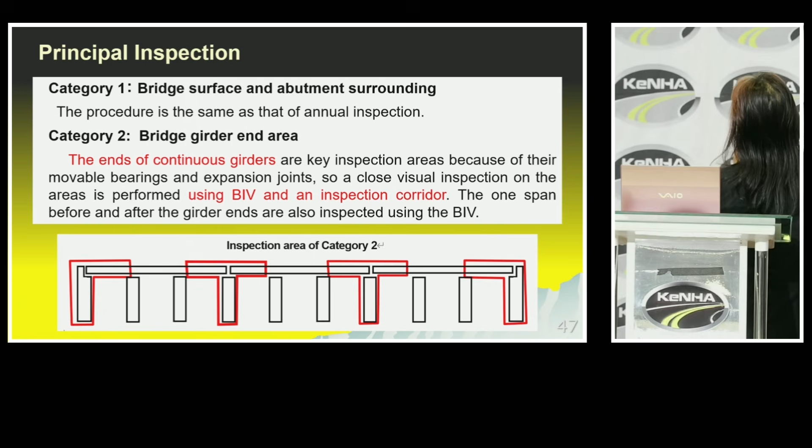For the bridge surface and abutment surrounding, it's the same as the annual inspection. For category 2, the bridge girder end area, this area is very important, so the bridge inspection vehicle and inspection corridor can be used to check it.

We recommend to monitor not only around the abutment or on the pier, but also to use the BIV. We recommend mobilizing the BIV for at least one span from the girder end.

This is just a little more detail, but for the Mteza and Mwache Bridge, there's an inspection corridor here. You cannot set the inspection vehicle on the left lane because the length of the arm is not enough, and you cannot descend the deck on this side. So please only set up on the right side and use the inspection deck like this. This is mentioned in the manual.

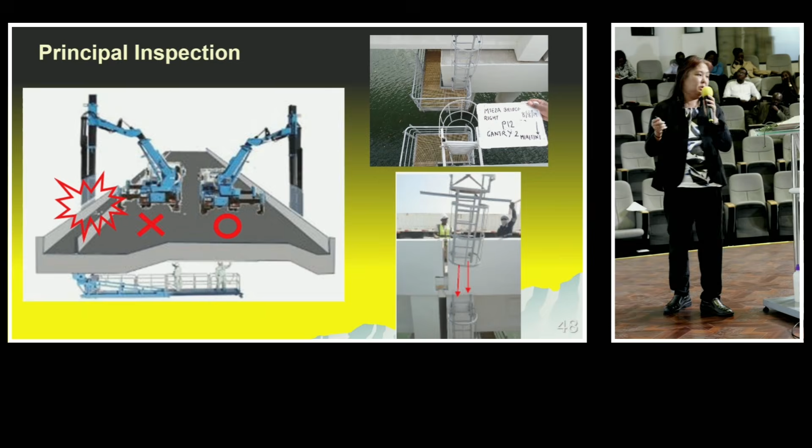Also in the manual, we explain how to set the ladder, because usually this kind of ladder is removed, and there are two sets of ladders that you have to put in place anytime you want to access the inspection corridor. Please keep these two sets and set them whenever you want to go down and use the inspection corridor for inspection. The manual explains how to set this extension ladder here.

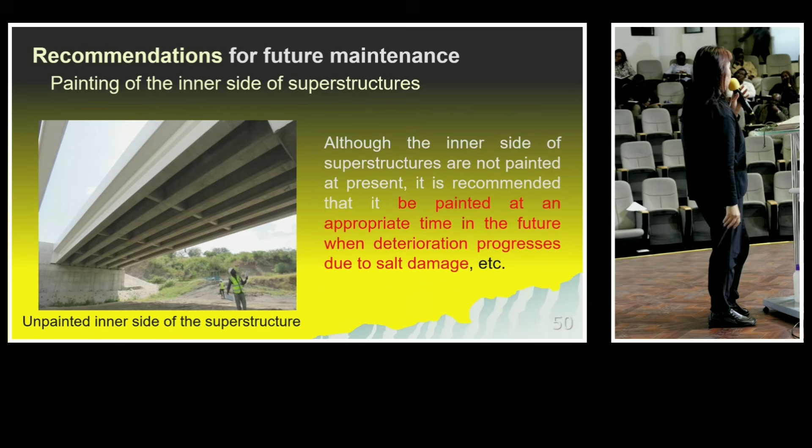This is the last part of my explanation. In the manual, at the end, recommendations for future maintenance are mentioned. Initially, the surface of the girder is painted, but the inside of the girder is not painted, it's just pure concrete. The concrete surface is not painted due to budget restrictions. But so far it is okay, because usually salted air hits the outside girder, and the inside of the girder is usually not affected by salty air. But in the long term, if the girder is damaged or deteriorated, I would like you to apply the paint at a certain timing.

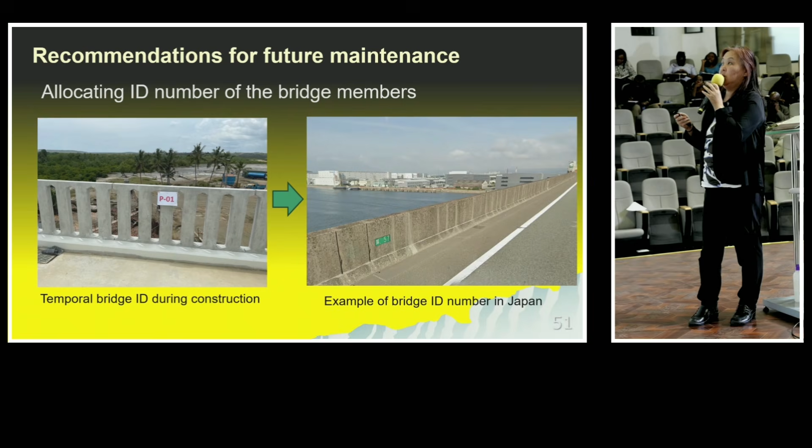Also, this is for the operation of maintenance. On the girder, we cannot see where the pier is. On the downside, we don't know, because it is a continuous bridge. So, if there's a joint, we know there's a pier below, but we don't know where the pier is because there's no joint for a continuous bridge. So, from our experience, we put this kind of ID number on the bridge, so we understand which is the end of the girder, like this. This one was set during construction by the contractor. It means it is over pier 1, but there's no joint. This kind of thing is very important, so we recommend putting some kind of ID number on the bridge to aid maintenance.